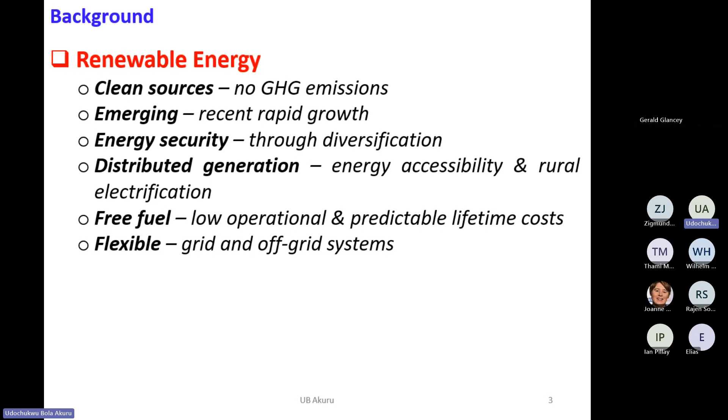Okay, so let me first of all take a deeper look into the electric vehicle sector, which is one of the areas I apply these machines. As at last year, the market value for the electric vehicle reached close to 382 billion US dollars. That's quite a lot. So you can understand the reason why most of us are looking in that direction. There's a lot of money there, although we are still expecting that money to come to us.

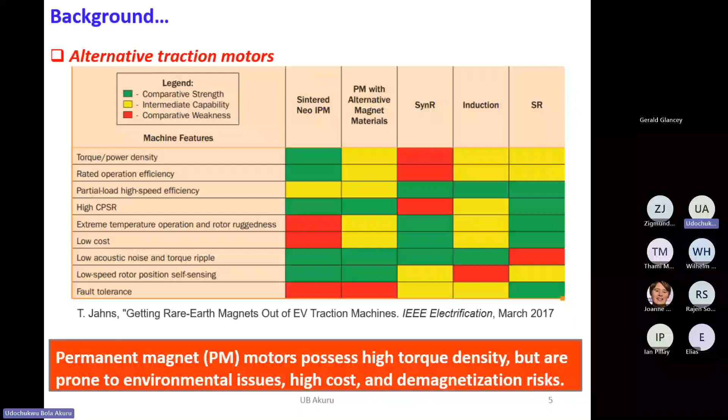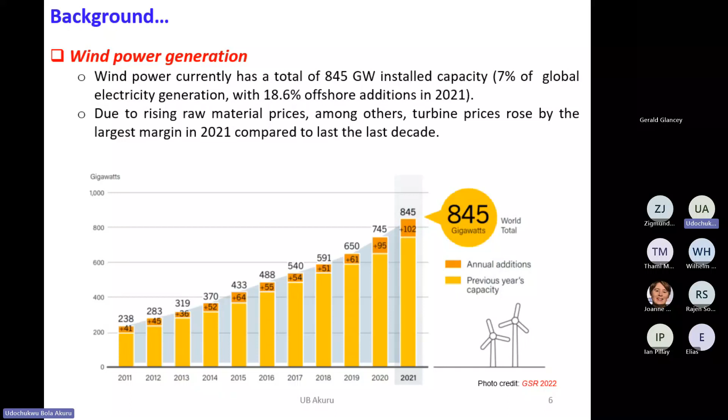But as I go into wind power, we also see a growth in the sector over time. I think currently it should be getting up to 1,000 gigawatts in terms of global wind power capacity. So it's actually growing. Another thing we see is that the raw materials used in that sector are also mostly permanent magnet based, but I will talk about that later. These are some of the reasons why I'm interested in this area in terms of renewable energy, electric vehicles, and wind power. As we know, for wind power, the electric generator is a major component.

In this slide, we want to look at the trend from where we started and where we're currently sitting. Over the years, we have moved from fixed speed systems to variable speed systems. The issue with variable speed systems is that as we transition, they become fully dependent on power electronics, which is also a major concern in the industry. I just have to emphasize that. The shaded circles there show current wind turbines, how they have become very large and more dependent on power electronics. The other thing is the size of the components: with a bigger turbine, the generator also becomes much bigger.

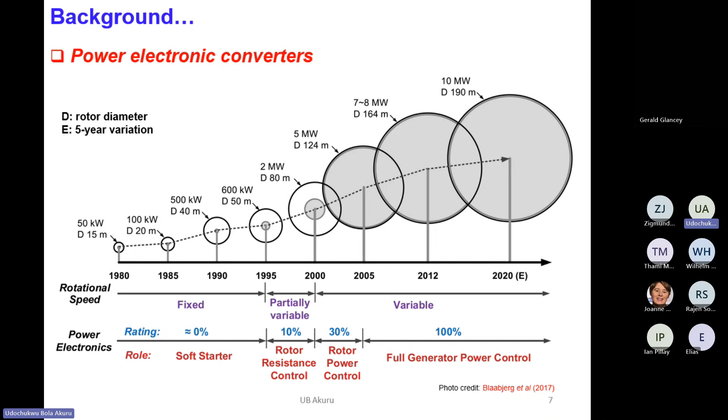Looking at wind turbine drivetrains, what we have seen over the years is a shift from geared systems to gearless systems. The reason is reliability. With the gearless system, there seems to be a higher reliability factor. The other issue is that LCOE, the levelized cost of energy, is much better with large-scale wind power, which usually goes offshore. For that reason, you want a system suited to where logistics, maintenance and other things are involved. So that is the trend.

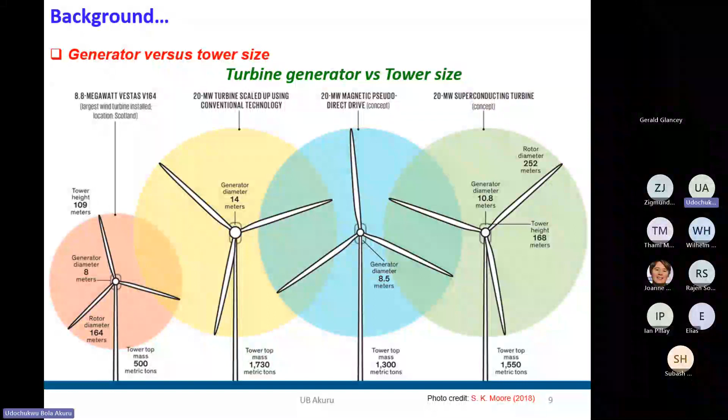This is just to emphasize what I've been saying. The industry outlook is going towards large-scale wind power generators because they provide more output per cost. The idea is to get them as big as 20 megawatts. Currently, I think the largest one industrially is 16 megawatts, with about 242 meters of tower height, the largest one for now, in China. The trend is to make them super large so that we can get more power. With these kinds of systems, you can feed hundreds of thousands of households with renewable energy.

Now, given that the wind industry is turning to large-scale direct drive permanent magnet synchronous generator solutions, what are the highlights? For such large-scale direct drive systems, we see that generator performance is better. Maintenance is better. In the generator and gearbox design weight there is a trade-off, so it's also better. We see that the offshore trend also favors it.

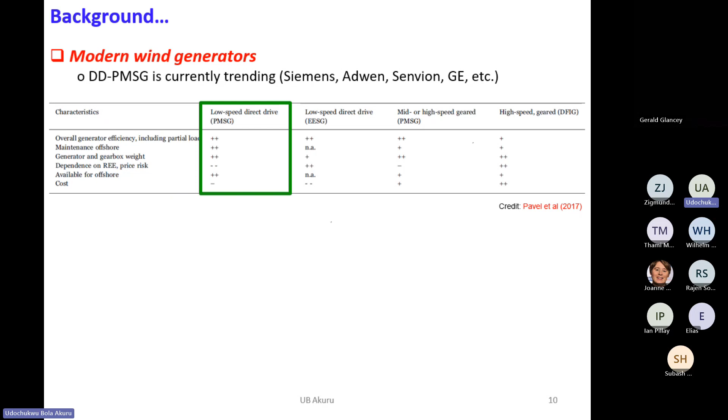But there are two things we have to highlight, and that is their dependence on rare earth permanent magnets, which also affects their overall cost. So that is a problem. Otherwise, that is the trending technology in wind power generation. For me, that is what motivates the research. So I go into the motivation.

Having looked at electric vehicle motors and the wind power sector, which are just some sectors in the renewable energy industry, my motivation is that 50% of the world's neodymium, which is used mostly in rare earth permanent magnets, is mined in China, with over 90% of these permanent magnets produced there. In 2011, there was a market crunch which led to artificial scarcity of this material. The graph on your screen shows the amount of inflation, 2,500%, within the space of a few months.

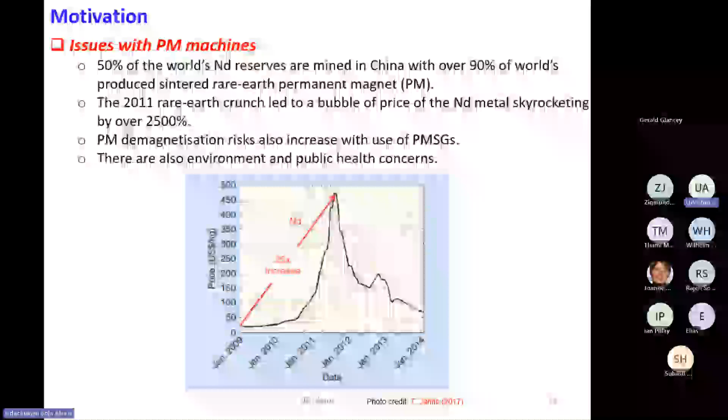And I think that was just about the same time I started my PhD. I started my PhD in 2014, and there was a craze for alternative wind generator technologies. That is why I focused more on non-permanent magnet solutions. So we also have to emphasize that with permanent magnet, there's also the possibility of demagnetization in certain performance regimes. Then maybe some of us are not aware, there are also environmental and public health concerns as regards to how these permanent magnet materials are being mined.

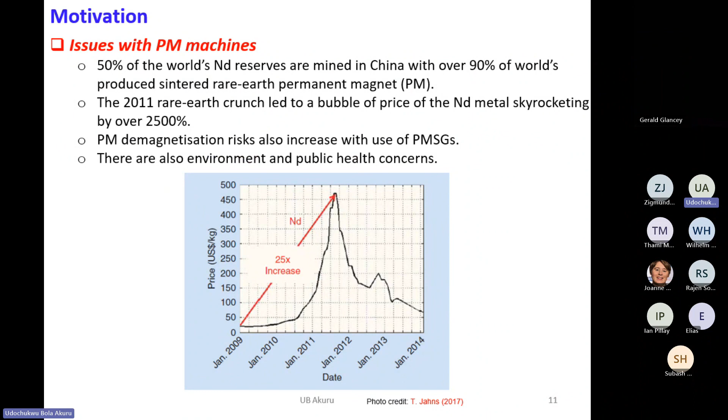So because of these reasons and some other reasons also, maybe the argument is, okay, well, if you say the permanent magnet synchronous generator is not good enough, then let's go electrically excited. But with the electrically excited, I will still say that is a conventional technology, that it results in much heavier as well as much larger technologies compared to the PMSG in terms of torque.

Of course, they use slip rings and brushes for their excitation, which brings some problems also in terms of cost and maintenance. Because of the field winding being used there, the electromagnets, the efficiency is also not that good. Then there is not so much interest in the industry to develop them. I think for now, it is only Enercon that are using these solutions for large-scale wind power generators.

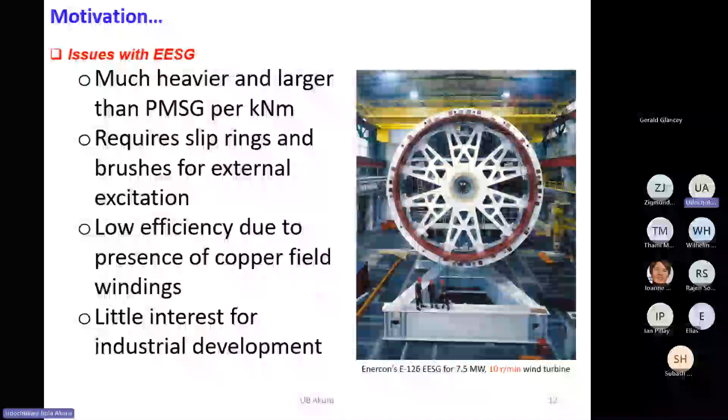Okay, so now I come to the electrical machine design theory. So why have I said what I've said, and why am I here? So let's go back to the electrical machine design theory. Every electrical machine designer's interest is in this performance metric, which is torque density, not power, but torque. The reason is because to design an electrical machine, you need torque. So this is your torque rotor volume equation. And clearly we see it depends on three things. Maybe it's not as clear here, but in the next slide. But for now, one thing that is clear here is that it depends on volume, which is your diameter as well as your stack length.

And over the last century, we have seen that this particular performance index has been improved 100 times. So are we at the sweet spot? Are we at a good point where we feel, okay, we've achieved a lot and we don't need to bother anymore? So that is what I want to delve into. We can still push this further.

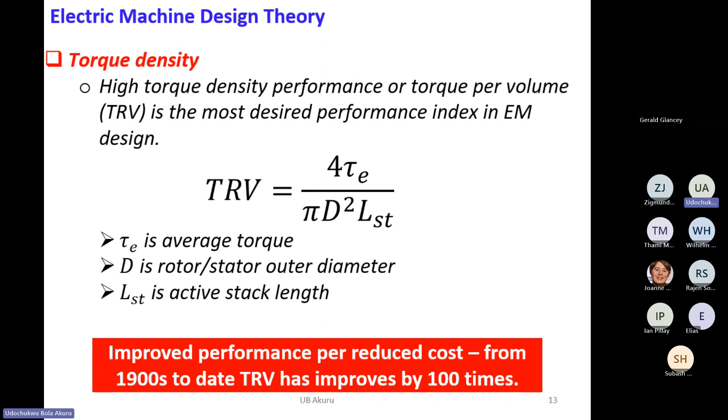So with the classical electrical machine theory, torque is basically based on three things: magnetic loading, electrical loading, as well as machine volume. So if you want to affect torque, which is always our interest, we want to tamper with these three parameters: the magnetic loading with the source of the excitation, the electrical loading which deals on the load in terms of the armature, and the volume of the machine which deals on the material you use in designing, or the space where this machine sits in.

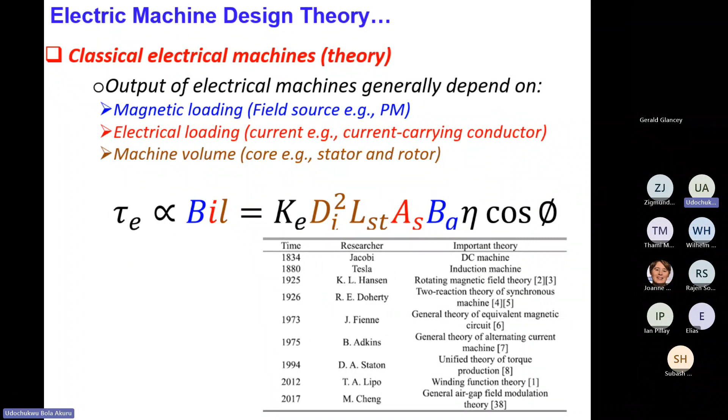And for that, we know it will depend on this same parameter which speaks on the volume, which is diameter and the stack length. AS is the electrical loading, which speaks on the current carrying conductor, while BG speaks on the magnetic loading. So there are pros and cons if we try to touch any one of them.

So for example, we say, okay, let's increase volume so that the torque of the machine increases. Our machine becomes more bulky, more expensive, and poses manufacturing, maintenance, as well as logistics issues. So we know for very large scale machines, like the 20 megawatt wind turbine I showed, it becomes very difficult to transport them right into the ocean where they may be needed to operate. And some other issues when there is maintenance, the expense that it brings about and all those things.

But if we tamper with the electrical loading, we will increase costs as well, because losses will increase. Then we need to concern ourselves about what new, innovative or expensive cooling measures we need to adopt. And also it leads to saturation issues, which reduces the performance. If we say we want to increase the magnetic loading, that will also lead to more costs, because, for example, it means you need more permanent magnet materials, which means more cost and stuff like that.

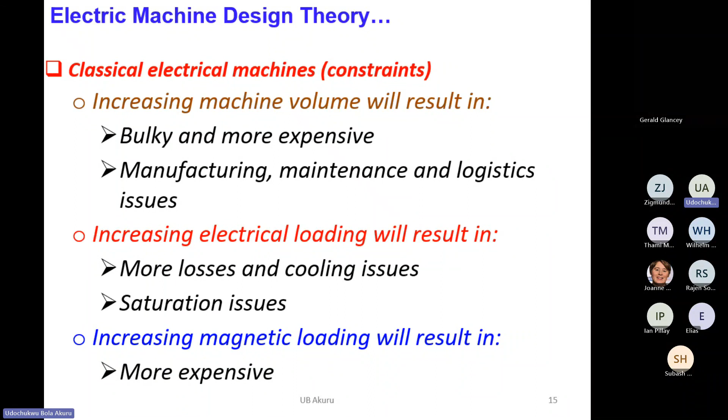Okay, so on that basis, the classical electrical machine torque equation suggests that the poles of the magnetic field on the stator as well as the rotor, just to put it in simple terms, must be equal. Hence, we don't usually see it in the classical back EMF equation, which is this. So you could see here the number of poles on the stator and the rotor, defined by PR and PS, are not indicated.

But we can expand the equation to show you that those poles are actually there. The only thing is that they are the same, and hence they cancel out. So if PR is equal to PS, then it's 1. But it is always there.

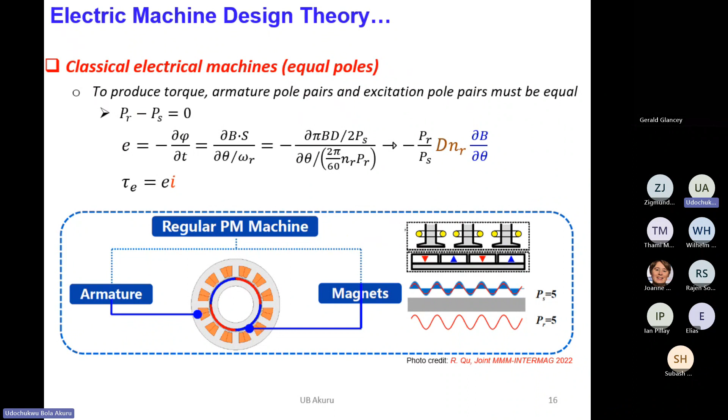So that is what will lead me to the next thing I will be talking about: with a regular machine, where PR over PS is always 1, and it has never been an object of interest in terms of increasing torque density, can we tamper with these values, make PR not equal to PS, and see what impact it will have on torque performance? That leads me to the next thing I want to talk about, which is the so-called flux modulating machine.

So can we have a situation where these two poles are not the same? And please have in mind that these are just magnetic fields, right? With different magnetic fields, you have a vector. The poles are necessary for electrical machines to be the same in conventional machines, so that you can get that torque, the rotation. But can we still achieve rotation? Can we still have torque performance without these two being the same?

Well, let's see. Let's go back to the conventional equation where we said that PR should be equal to PS. And we say no. Of course, they can differ. So if they differ, how can we achieve that? And what will be the outcome?

Right on your screen here, the only way we can achieve a situation where PR is not equal to PS, that's the pole pair on the rotor and the pole pair on the stator not being the same, and still achieve a machine that operates and produces high torque density, is by introducing a flux modulator. When we embed a modulator between your armature and your field excitation, we are able to disrupt the pole pairs on the stator and the rotor, and thereby achieve a machine that produces higher torque density.

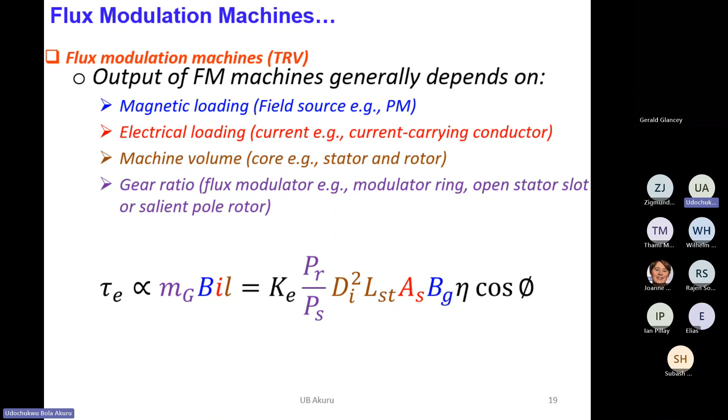So in the equation, it's the same equation; we only introduce PR over PS, which has always been there, just that they cancel out. In this case, it's greater than 1. So we're able to achieve high torque in the same volume. Please take note, the other parameters have not changed. And this is why we call it a flux modulating machine.

So what is the theory around this? The theory is simply that the stator pole will now be a sum of the modulator pole and the rotor pole.

So that is what alters it. And also the magnetic gearing effect will be introduced. So the flux modulating machines work on the principle of flux modulation as well as magnetic gearing. And we have been able to see, because colleagues have been able to show, that we can achieve up to 150 kilonewton meter per meter cube in terms of torque density in low speed applications for these machines. So if you have a high pole pair on your modulator, you are able to achieve high torque density performance based on the relationship shown.

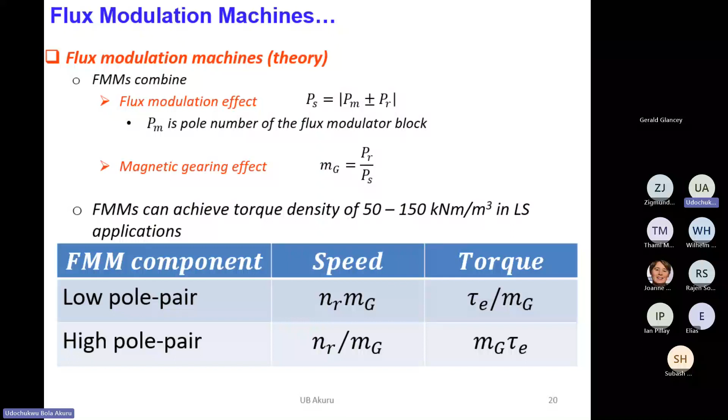So in terms of topology, nothing changes. Remember, when we talk about torque volume, it's not specific torque. We are still taking the envelope volume of the machine. So what we need to do is work within the space of that volume. If you have a regular classical machine, which works by same pole pairs on the rotor and the stator, we now introduce the so-called gearbox system, the flux modulator. I'm not sure if it's appearing clearly there. Then we get what we now call our flux modulating machine.

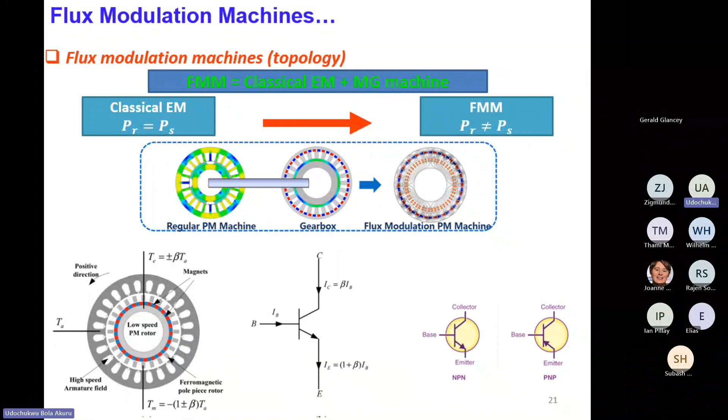So if you look at the first machine there, it's a 4-pole machine. But if you look at this one, because we only show the flux lines there, you will see multiple poles on the stator. So it has basically transformed the pole from low pole to high pole, reducing the speed, increasing the torque. So it is the same thing as your bipolar junction transistors, by the way, for those who work in power electronics.

Okay, so let's look at the classification of this machine. So what are the possibilities? The possibilities are so many. They are new machines, there are so many, and we give them a lot of nomenclature. But we achieve them basically based on these 4 different manipulations. So it is required that only one part of this machine should be stationary, but it is not necessary.

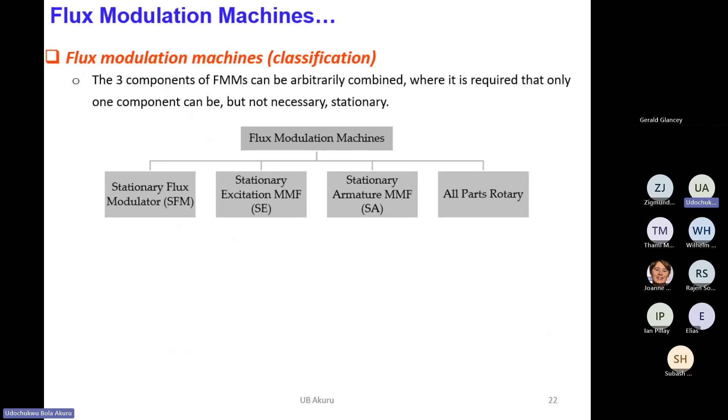So we can have a situation where the 3 parts of the machine are all rotating. You have your field part rotating, your armature part rotating, and your modulator part rotating. So you have a machine maybe made up of 3 air gaps, and each part of it is rotating. If you're able to achieve such a machine, you have even higher torque density. Sometimes we go to like 2 per unit the torque density under the same volume and magnetic as well as electric loading.

Okay, so let me quickly bring you to what I am more interested in with these machines. I didn't develop the theory, by the way, I only stumbled across it, and I felt it was interesting to see how to apply them in machine design, especially for renewable energy applications. So based on the motivations I've given already, with the growing renewable energy industry, as well as the need to look for alternative electrical machines for that industry, I present to you the so-called wound field flux modulating machines.

So take note, it is possible to design these machines with permanent magnets, so they work like your normal machines. You can also have hybrid excitation sources with the permanent magnet and the wound field. But I focus more on the wound field because here in South Africa, I don't think we have the permanent magnet resource. So if I'm able to develop this kind of machine, I can build them locally and also market them locally or even export them. So that's the idea behind it.

But the good thing about this variant of wound field machines, different from conventional electrically excited machines, is that when I take a conventional wound field machine, your electrically excited synchronous generator or motor, and I incorporate the modulator, which is needed to transform the machine into a flux modulating machine, what we achieve is a wound field flux modulating machine with 2 important features hitherto not present in a conventional electrically excited wound field machine: this machine automatically becomes brushless. I can transfer all the active current parts to the stationary member.

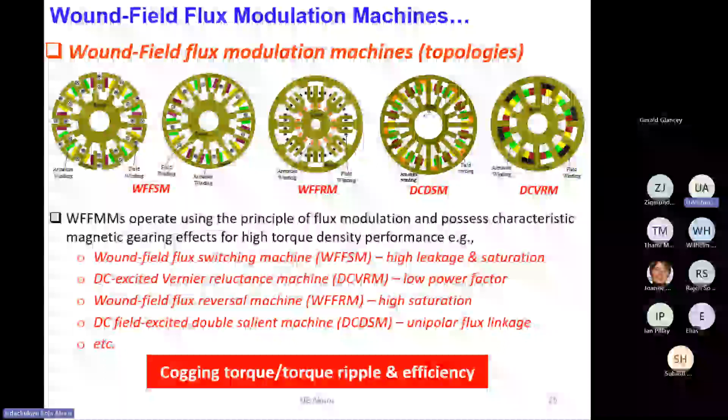But that is what drives our research, and that is what we try to address most of the time in our study. Okay, let me quickly go to the design evaluation of these machines. So it follows the conventional method of evaluation, so nothing out of the ordinary. The only good thing here is that you have new variants of these machines, so you can easily motivate for new contributions in terms of research. And it is not yet developed in the industry, by the way. So that is what we are driving towards.

So we start, first of all, by giving the technical specification of the machine, and form new topologies where possible. I will show you a topology we formed, just a simple one, based on the double stator design, or you select based on existing topologies and align them to your design needs. We size them based on the torque rotor volume equation I showed you, and we evaluate them analytically as well as with the finite element method. So we are able to also optimize them based on a multi-objective and global optimization landscape.

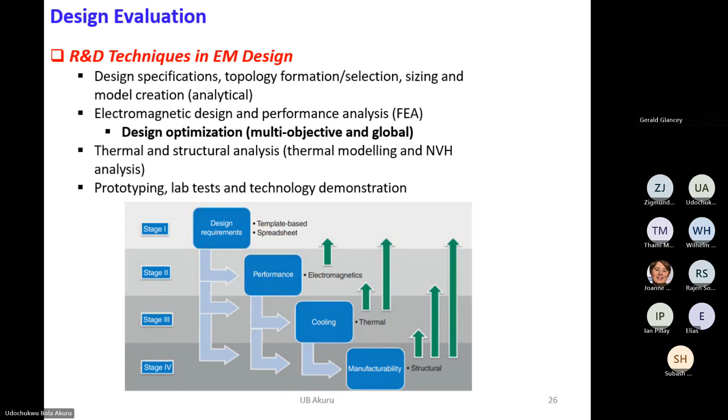One aspect I've not touched on, which I know is also not that addressed in the field, is the structural analysis, but some studies are ongoing. And last year I was in Germany for a research visit. The concern of my host was in this area, that if we really want to push these machines to the industry, we need to address this point. So it's something I will also be looking at in the future, but some other colleagues are already working on it. Then, of course, prototyping, lab tests, and demonstration of technology.

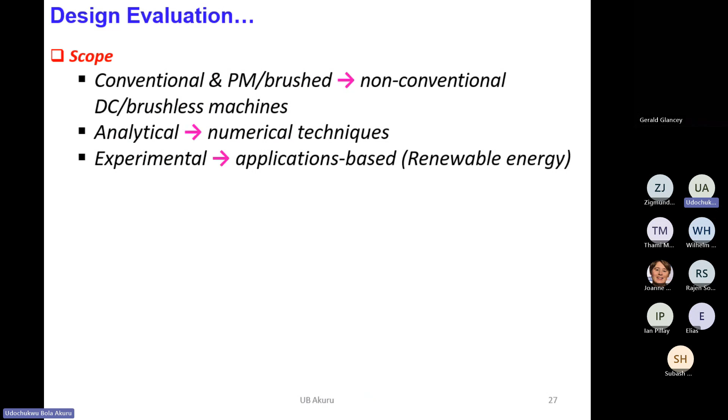So the scope for me in terms of this design is trying to move away from a conventional machine and a PM or brush-based machine to a non-conventional, non-PM brushless machine. I deal more with numerical techniques than analytical methods. Mostly I only apply the analytical method in the sizing of the machines, but I do the numerical analysis even with the optimization. That gives more reliable results, but sometimes it may be more expensive in terms of time. Then, of course, I also try to move away from just doing experimental work to apply it in a specific area, especially renewable energy.

Okay, so these are some of the technology applications of these machines. So like I said, this was mostly during my PhD study. We were able to design and build a 10 kilowatt wound-field flux switching machine. We were able to test it. You can see the measured results with the predicted results, and they align very well.

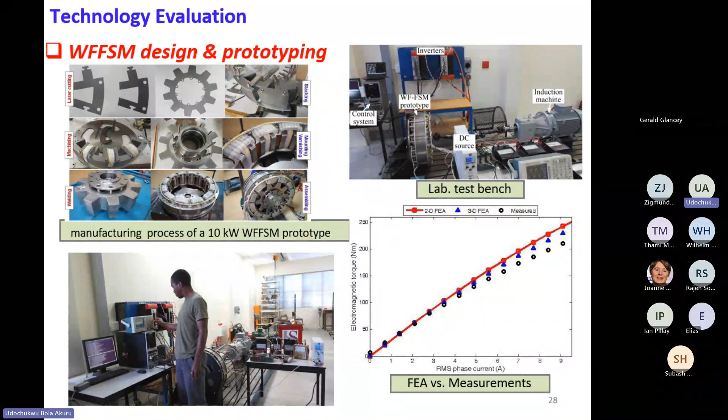So this was designed for a wind generator based on the medium speed wind turbine drivetrain. So with a gearbox, but not as big as your high-speed gearbox. So we got some interesting results, and we also did this study at utility scale at 3 megawatts. And you can always access the findings from that study.

Because I left the place at that point to come to TUT, I couldn't finish this study. Some other students took over, and they tried to also apply it in a synchronous condenser application, which I believe the SAIEE, this particular committee, would have been acquainted with. I think my colleague, Dr. Mabula, made a presentation in the past on that.

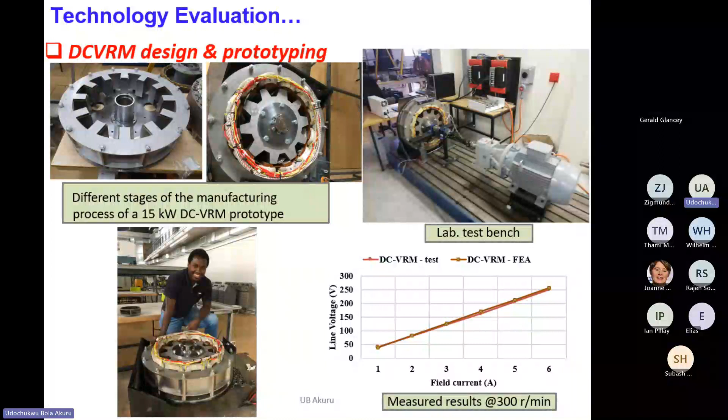So currently I'm working with my colleagues in Pakistan as well as at Wits University. So this is a new topology I propose, the double stator wound-field flux switching machine design. So remember, like I said, with the wound field, you don't get as much as you get from a PM design. What we have noticed, especially in my PhD study, is that as we try to go very big with these machines, we create a big bore on the rotor. Most times that bore is just there, and it will not be too economical to design a rotor to fit in that bore. So what we try to do is to put another machine into that bore. So that's what brought about this.

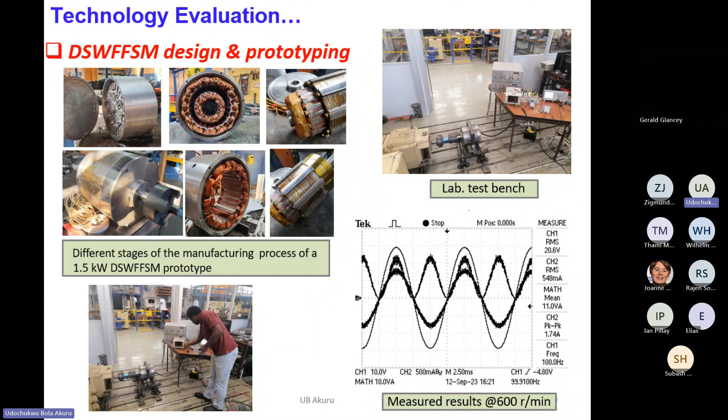So remember, the torque density is improved by that, because the envelope volume is still kept the same. So that was the motivation behind this. So we introduced another stator, which we call the inner stator, to boost the torque density. And currently we tested the machine, and it is working well at Wits University with Dr. Lesedi. We've prototyped and developed it. All of these things we have built and developed locally in South Africa. We didn't need to import any material. I work on this mostly with my colleagues in Pakistan.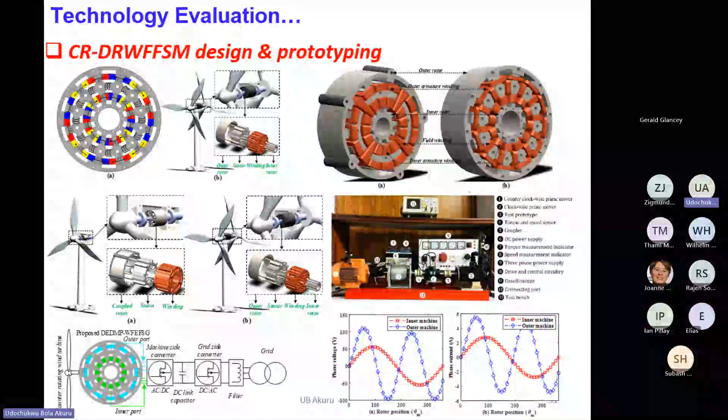This is one other thing we stumbled across when we were working on these machines: since we have a robust rotor, we were able to find out that these rotors can yield very high inertia, so we were able to apply it in a synchronous condenser application. And we did some theoretical study even for very large synchronous condensers, 250 MVA. And we did some experimental study, and it worked perfectly like an electrically excited synchronous generator. The beauty of this is that, maybe colleagues in power electronics will not agree with us, but as we begin to penetrate renewables more into the grid, and the concern for inertia is there, we can always use these machines to buffer the grid in such instances.

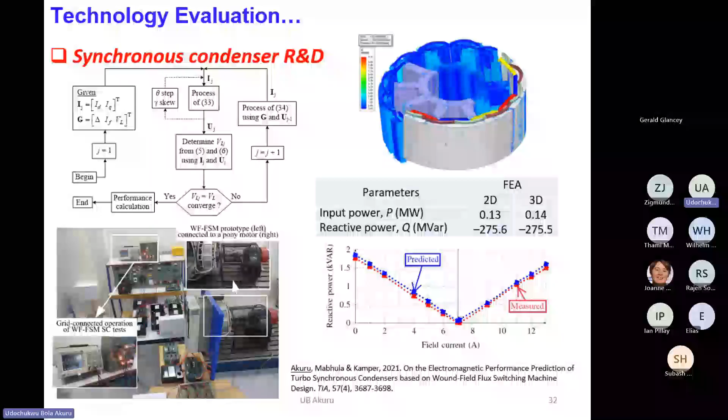Also, somebody had a good question earlier on: why is all the interest about the generators? Of course, that's my interest area. But I'm also now looking at the motor application, and more recently also for industrial motors. So this is a study where we use this machine on industrial motors. We compare it with a squirrel cage induction motor. As you can see, the efficiency is higher, like it would be for a conventional electrically excited synchronous motor.

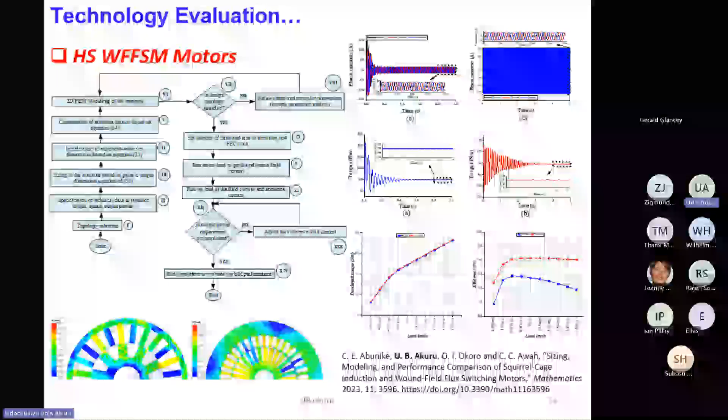We also do the dynamic performance and also the torque. So this is the torque. You can see at the same torque, we're able to achieve higher efficiency. So this is one of the things we are able to use these motors to do. So even for motor application, we can also apply this. Once again, they don't need slip rings and brushes.

Okay, so what is the future outlook? There are a lot of topologies. I just picked some of these from other colleagues, what they are doing, to show us the possibilities. There is the so-called partitioned stator multi-tooth design topologies to improve in terms of the acoustics, reduce the noise, improve on the torque ripple. There is the axial flux design to increase the torque density.

The last time we had a presentation, the colleague mentioned the axial flux machine. So we can also design these machines based on the axial flux topologies. We can also incorporate innovative windings like the Litz wire, which has been incorporated into this machine to boost the performance. There are also the dual mode machines where you have dual electrical, dual mechanical.

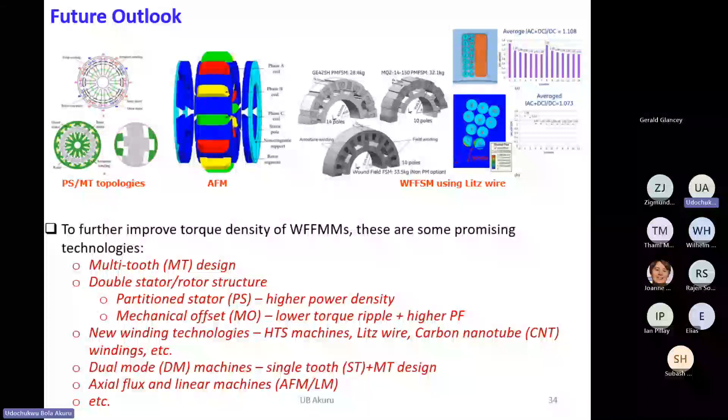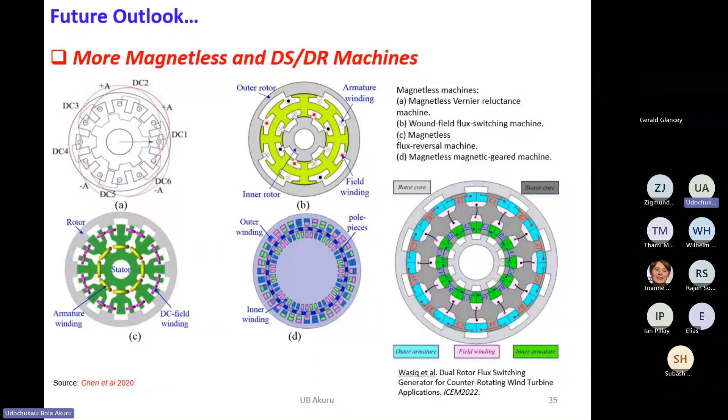There are also new winding topologies where you have high temperature superconducting materials being used for the windings, or carbon nanotube windings, and so on and so forth. So there are a lot of options available, and some of these studies are mostly experimental, but show interesting results. Also, we have what we call the magnetless double stator, double rotor machines. It is mostly what I do. So those are things that are still there for us to explore.

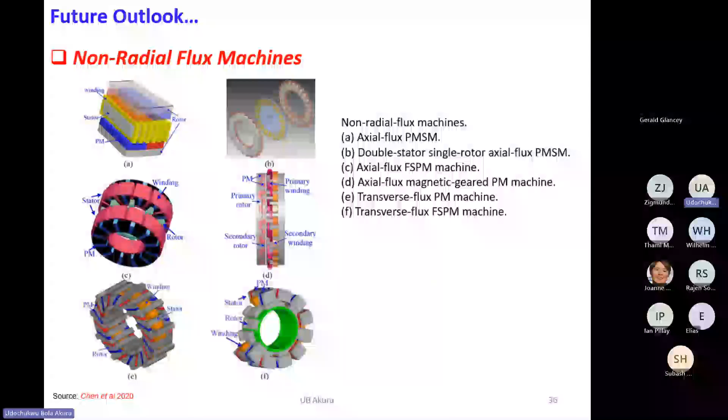There are non-radial flux machines. Mostly the ones I've been looking at are the radial flux machines. So we can also have the axial flux, like I said, or the transverse flux machines, with advantages also in terms of torque density improvements. There are advanced novel winding designs based on superconducting materials, like I've mentioned. And of course, there is the renewable energy application, which drives mostly what I do.

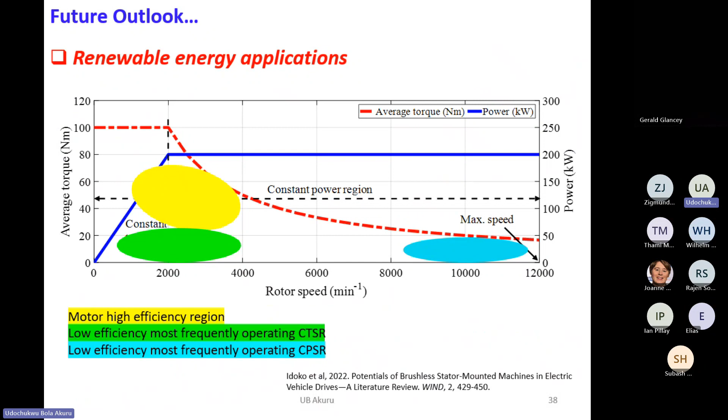So for example, recently I began to look at traction motors, especially in South Africa for the mining industry. One of my PhD students is actually working on this. This is mostly the operating space, the green parts, where we want these trucks to operate. But most times this is not the high efficiency spot. What we are hoping to show is that with these kinds of machines, we can actually achieve high efficiency because we can vary the flux. So we will likely be able to show that we can extend the efficiency performance regime.

So what are the other research areas? The mechanical design and the acoustics is, I think, the last stage before the industry begins to take us seriously. Not that some are not already looking at this. One of the studies I showed you was done by ABB Research. I think in Stellenbosch, ABB was also involved with the vernier machine technology. So there are some industries already showing interest, but maybe not at the commercial stage. But hopefully, when we address some of these challenges, it can fly.

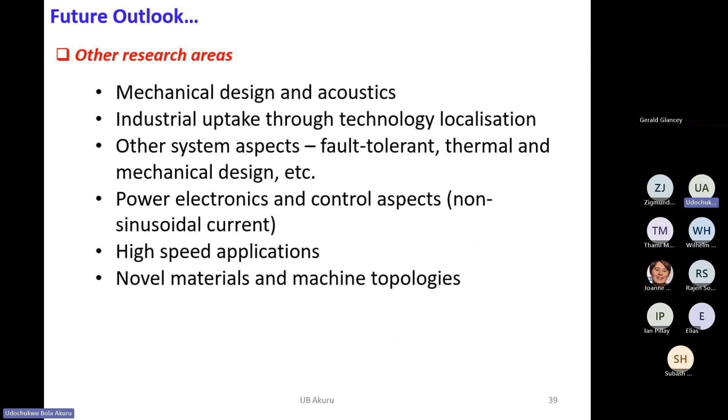And I want to tell you, there is a lot that can still be done in this field because these are so-called emerging machines. Remember, your induction motors and your synchronous motors have been there for hundreds of years. So we are beginning to look at this, and there's a lot we can just duplicate that has already been done with the conventional machines.

Okay, let me just quickly conclude by saying that the so-called wound-field flux switching, flux modulating machines, which I've highlighted in this presentation, offer high torque density capabilities without the need for slip rings and brushes, making them well suited for the renewable energy sector. Understanding their theoretical operating principles will enable electrical machine designers to effectively evaluate and optimize their design for maximum performance.

With the rapid growth in the renewable energy sector, in terms of wind and electric vehicles, these machine variants, especially the wound-field machine variant, present an exciting opportunity due to their high torque density, efficiency, and robust performance. Their development and adoption can also support our national as well as global transition to sustainable energy systems. The research potential in this area is quite large, and it begs for all our attention and expertise.

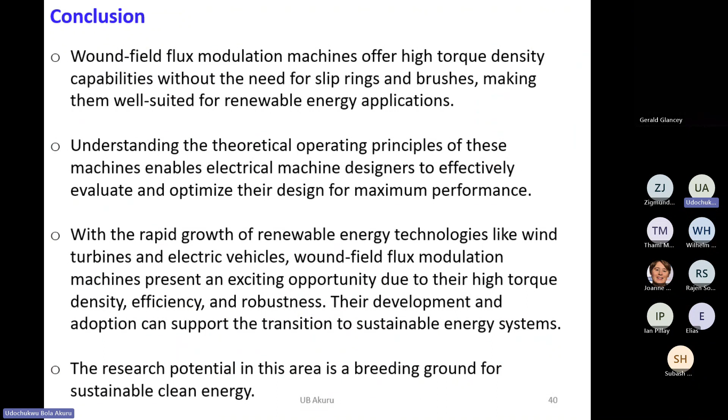Then we'll go to our virtual audience. Any questions on the talk? Okay, so maybe I can ask one. It's very interesting.